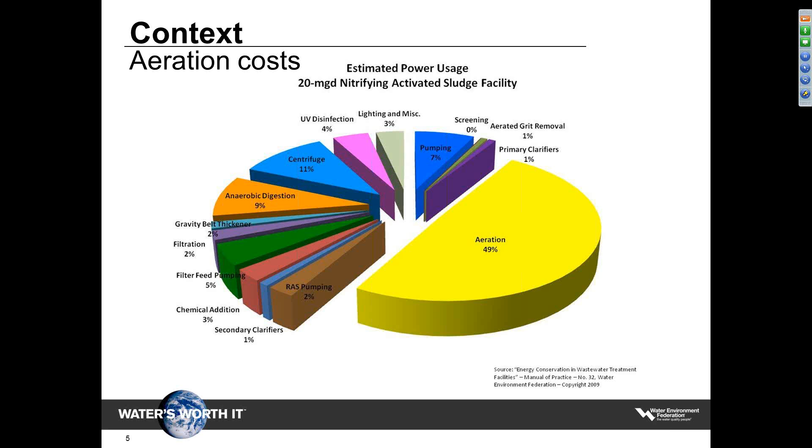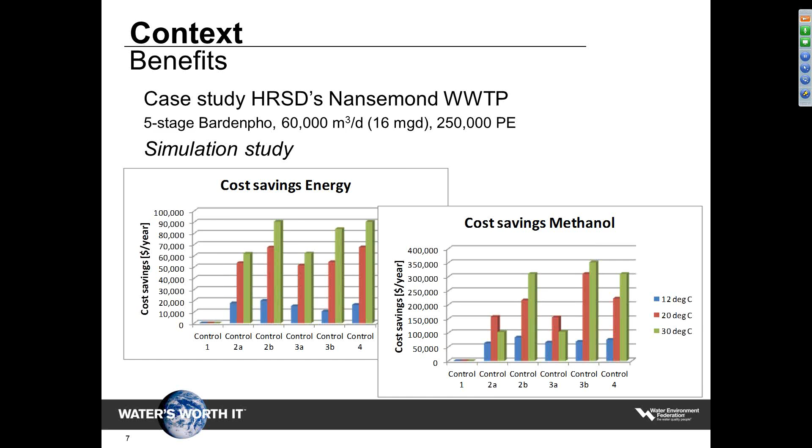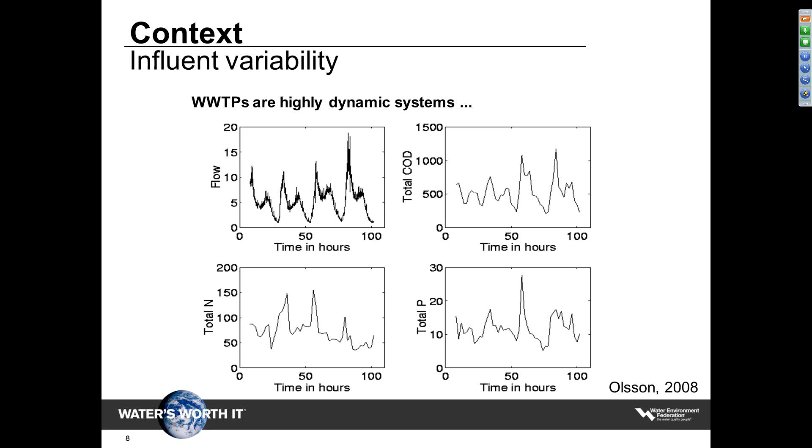So let's have a closer look at it. As you have seen in the previous slide, we have this very high variability of the incoming load and the temperature. However, we typically deal with fixed reactor volumes, so you have fixed volumes for unaerated and aerated zones. And then we design these plants based on peak loads. This is something we have to, because of course we would like to be able to deal with whatever is coming in, right?

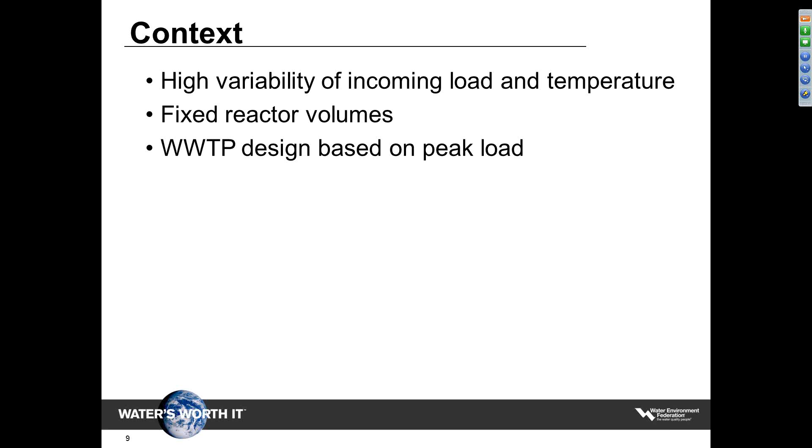All this together means that, well, we have, per definition, unused capacities, right? Because we design for peak loads and we have these variations, and this means that if the plant is not overloaded, every single day there should be potential to do something more efficient.

So what we discuss in the next slides is really biological nutrient removal plants. And as you will know, nitrification is really the rate limiting step, and therefore should also be the target, or the primary target, of the aeration control strategy.

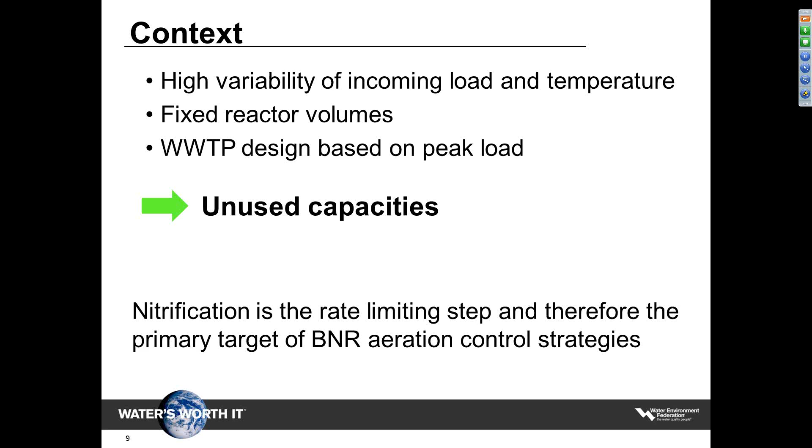Because of this, I would like to go more into nitrification fundamentals. So what is really required to run nitrification under optimal conditions? Of course, we need sufficient provision of dissolved oxygen. We need ammonia as a substrate and some essential nutrients.

This sounds trivial, I guess, but I would like to make clear that if ammonia is gone, there's no nitrification. So it's not required, and therefore we also don't have to aerate if ammonia is gone or is below a certain set point.

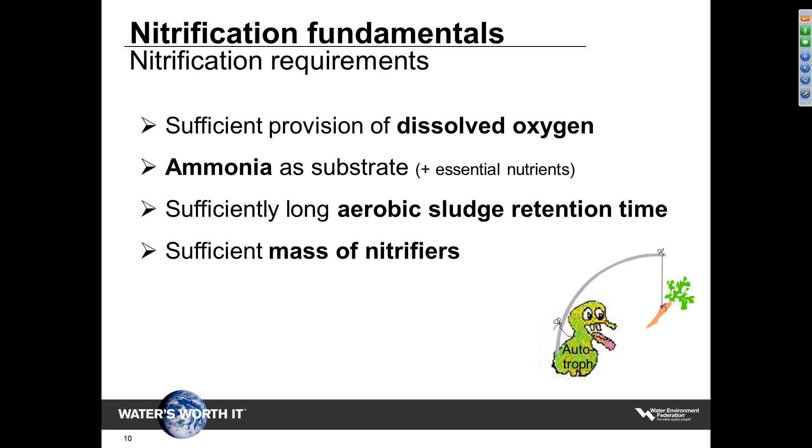What we also need is an aerobic sludge retention time, so that this is sufficiently long. And in the end, what we need is a sufficient mass of nitrifiers. And this is quite important. I will come back to this. So this is a key feature if you would like to design your aeration control system.

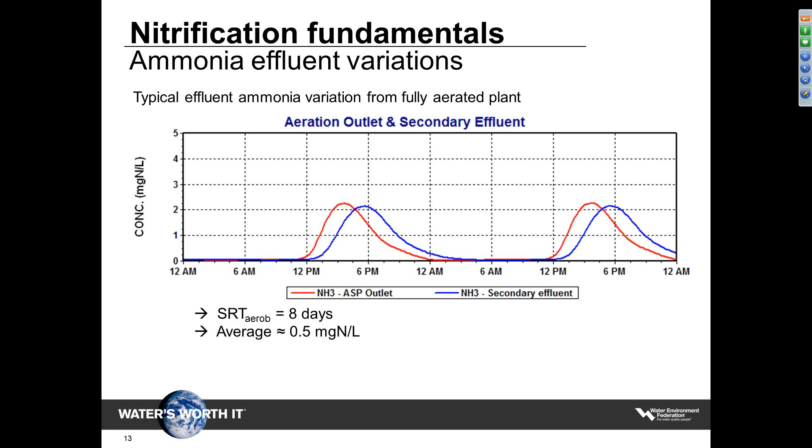And altogether, the effluent concentration of ammonia is about 0.5 milligram per liter. So we will probably call this a fully nitrifying plant, right? So what is the reason for these peaks then? The reason is that the mass of nitrifiers is changing slowly and also depends on the average ammonia load and the sludge retention time. So the sludge retention time was sufficiently high. So in this case, it's only linked to the average ammonia load you removed.

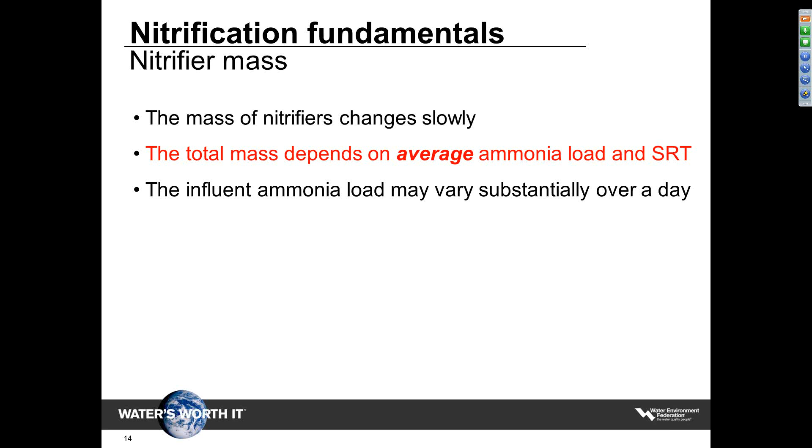So on the other side, we have quite a high variation. Of course, this is an example. There was quite a variation in the influent ammonia load, and this varies substantially over the day. So you have this variation, and you have an average nitrifier mass.

This means that ammonia breakthrough often is due to the limited mass of nitrifiers and not at all linked to insufficient oxygen. This is quite important to understand in order to properly design your aeration control system. Sometimes you cannot fix something with just increasing aeration, right? So it's not linked to oxygen. Often it's really linked to the mass of nitrifiers, and you have to come up with a control strategy dealing with this.

Okay, so let's have a look into different ways of controlling your aeration, and the focus really is on ammonia-based aeration control. In fact, there are two different control goals or objectives here, and it's quite important to distinguish the two to make sure you come up with the right control strategy.

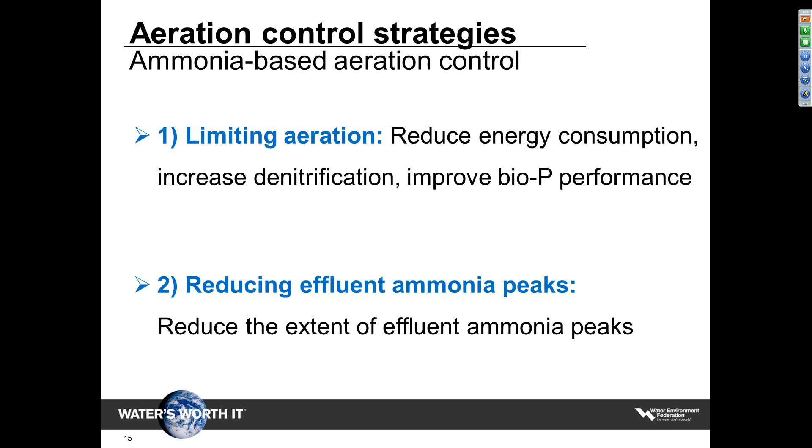The first one is limiting aeration. The goal is to reduce energy, increase denitrification, improve BioP performance—really optimizing the efficiency of your plant. The second goal is to reduce effluent ammonia peaks. So it's not about efficiency, it's really to reduce the extent of the effluent ammonia peaks.

If we look at the first option, limiting aeration, the first thing I'd like to discuss is what's really the difference between DO and ammonia control. The DO control is to provide optimal conditions in terms of dissolved oxygen for all aerobic processes—this is nitrification, but also organic matter removal.

Ammonia control, so if you introduce an ammonia sensor and do ammonia control, this is really to optimize nitrification. The reason is that nitrification is the rate limiting step in typical municipal wastewater treatment plants. So as soon as you fully nitrify, or nitrify down to a low set point, the organic matter is gone as well. So you don't care about organic matter, you focus on nitrification, but this is sufficient for most plants, mainly municipal wastewater treatment plants.

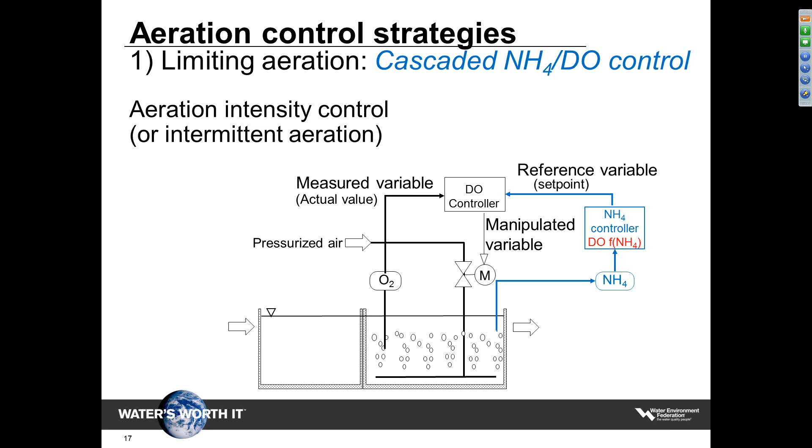Another way of implementing ammonia-based aeration control is that you only measure ammonia. This goes into a controller, and the ammonia controller directly calculates the valve position. I am not that in favor of this solution, and I will discuss why.

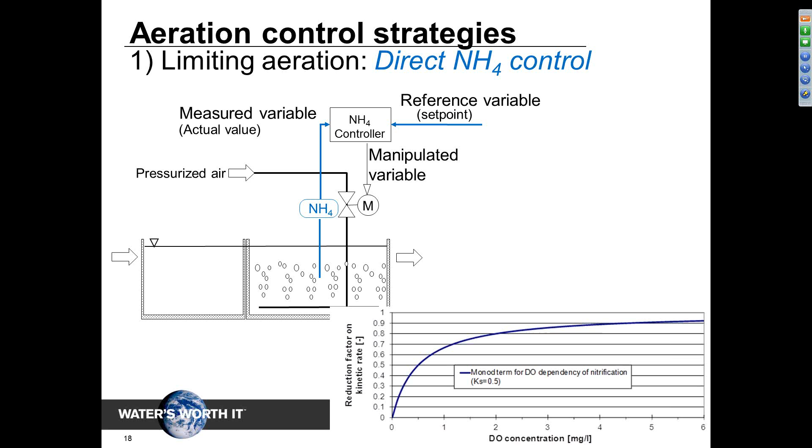So this is bringing back this graph I showed before. What this means is as soon as ammonia is high, this controller will increase aeration. So if you have very high ammonia concentrations, or a peak of ammonia coming in, this automatically leads to over-aeration.

Of course, you could add another DO probe. What you would do then is just change the setup—it's also cascaded aeration control, but then the DO controller sits on top of the ammonia controller. The reason I don't prefer this solution is that it's more difficult to tune, and it also has some other practical limitations. So I clearly favor the first option.

Okay, so now we go to the second control objective. This is reducing ammonia effluent peaks. And there are also two different ways of doing it. The first one is intensity control.

So what we do is measure ammonia, or the ammonia load, somewhere early on, and you get fast information—oh, there's a peak coming in, let's say. Then you increase aeration to the maximum, so you try to provide optimal conditions for nitrification. You try to drive down ammonia in the tanks, and then you create a kind of buffer for the incoming peak, diluting it with low ammonia concentrations in your tank.

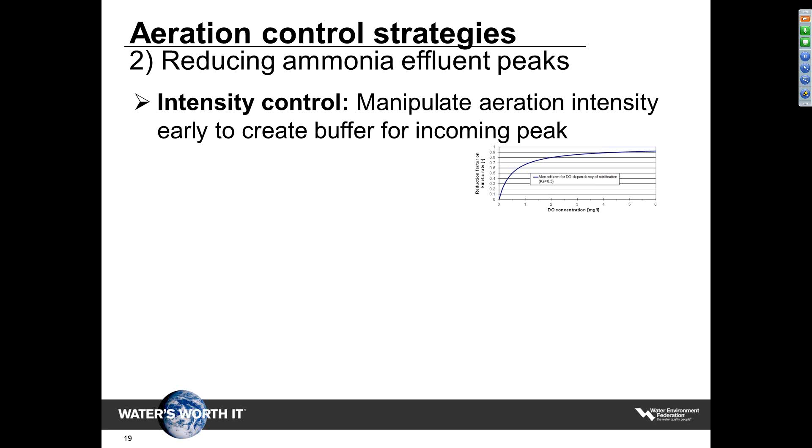The problem, again, is that the impact of this intensity control is quite limited, because more aeration—so higher than 2 milligrams per liter DO—is not providing more nitrification.

Another option to do this type of control is volume control. What you actually do is change the aerated volume by switching swing zones on or off. And what you do with this is really increase the mass of active nitrifiers. So this is quite a powerful solution, and in the case study you will see some more results.

Okay, so now some control fundamentals.

And this is mainly about feedback and feed-forward control and what are the differences. So I start with the most simple one. This is the feedback control.

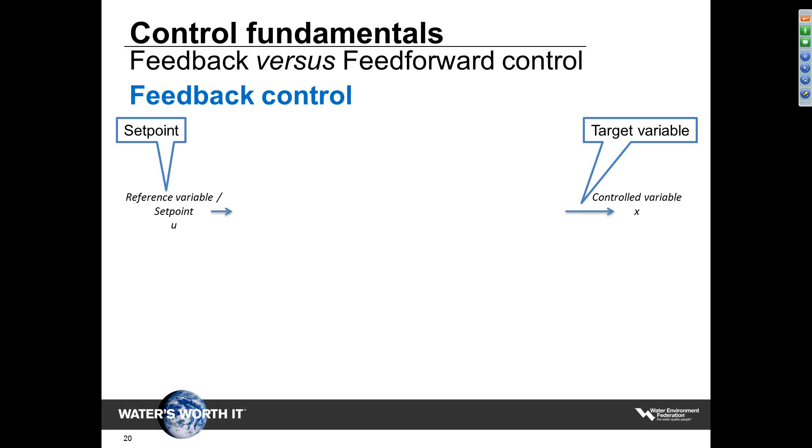And this is really what you should use if you can. So what you have is a target variable, or in control theory you would call it a controlled variable. And then you define a set point. The goal is to maintain the target variable or controlled variable around a specified set point.

Then you have the process and some disturbances. In our case, the process, this is your reactor or your reactors. And then you have disturbances, and this is the change in the influent load, change in temperature, change in operational settings, everything changing the process behavior.

To control this, what you do is you measure the controlled variable, and the measured variable goes back, is compared with the set point. You calculate an error out of it, and this error is used in the controller. The controller will then calculate a control action, and then hopefully this control action has an impact on the process and is able to deal with the disturbances.

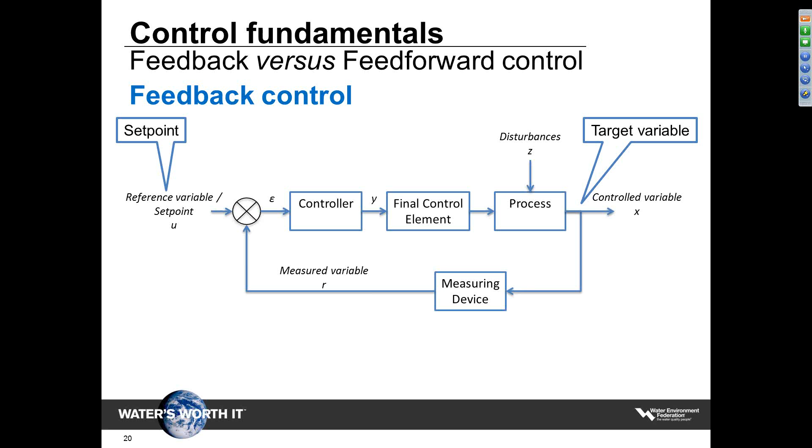So to remember, feedback control is really measuring the process answer. You don't have to know what's going on inside your tanks. You measure the answer, what's coming out, and then you change the settings of your control handle.

The opposite is feed-forward control. And as you can see, the lower part is exactly the same. The difference is that now, instead of measuring the controlled variable, you measure the disturbances. And the other difference is that because you don't know what's really happening in your tanks, you also need a model of your system. And this is quite an important fact.

If you now discuss advantages and disadvantages, the big advantage is that feed-forward control provides really fast reaction. And this is a reaction even before the disturbance hits the plant. So if you need to deal with fast processes, if you have peaks coming in where you have to react fast, then feed-forward control is certainly the way to go.

The downside is that you need a process model. And a model is a simplification of reality. You need sensors as input or signals as input. And this means that there's quite a risk involved, right?

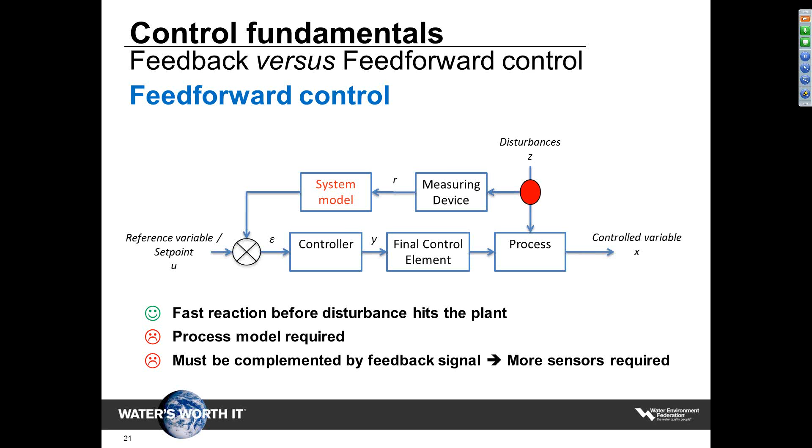Okay, so this is a graph, a scheme where we combined feedback and feed-forward control. You know the black part in the middle, the DO controller. The ammonia controller is also something I showed already. So it sits on top of the DO controller, calculates the new DO set point.

But what is new is the green part. So you measure the flow and the ammonia concentration, so the incoming load. And then the feed-forward controller maybe compares the incoming load with the predicted nitrification capacity. So what the model inside thinks is the nitrification capacity, and maybe decides to also increase aeration.

That the two controllers are not fighting against each other, we have put in a maximum criteria. So this is deciding which controller is going through. And we use the maximum criteria. This is pretty simple. The controller with higher air demands is going through. And this concept is also used in the case study, or was also tested in the case study.

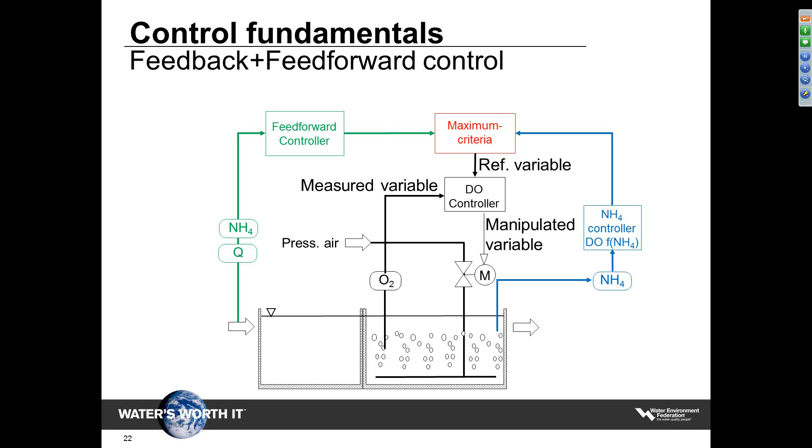And all these control loops are connected. This is mainly to make you aware that it's not a simple task to tune all these, because all have different time constants and have to be carefully tuned. So if you design your aeration control system, make sure that in the end you have an experienced control engineer doing the fine-tuning on site.

So this is not something you can do in a model. There has to be somewhere going out and tuning. And often you need some retuning after a while, or just make sure that your controllers are properly tuned.

Okay, so this was about fundamentals. Now let's have a look at this case study I mentioned earlier.

This case study was about the Nansemond plant, one of the Hampton Roads Sanitation District plants. It's a 5-stage plant, 60,000 cubic meters per day, 16 MGD, or about 250,000 connected population equivalents.

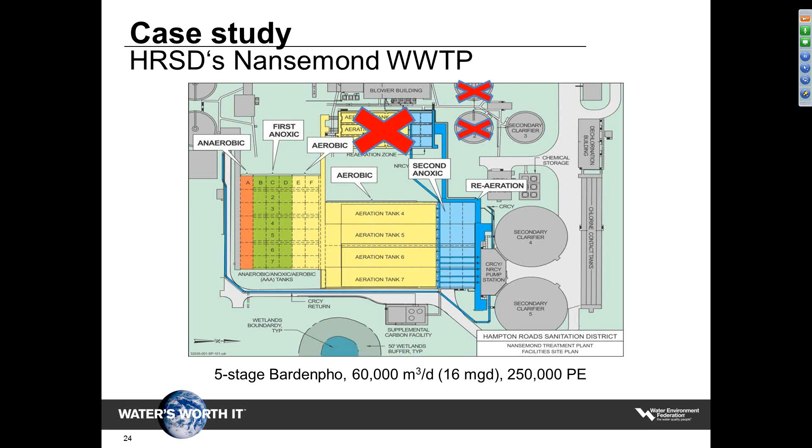We did a careful data evaluation and came up with 1 week of a typical pattern, including weekly variations and diurnal variations. We came up with 3 different influent and temperature scenarios, and then 1 scenario where we created an artificial ammonia peak, mainly to test the feed-forward concept and whether we really need to implement it.

We tested a whole bunch of different ammonia-based control scenarios. First, we focused on modeling the existing control strategy, just DO control. Then we had a couple of ammonia feedback controls, and then feed-forward feedback ammonia control. If you're interested, just drop me an email, and I can send you 2 papers from last WEFTEC where all the details about the control strategies are included.

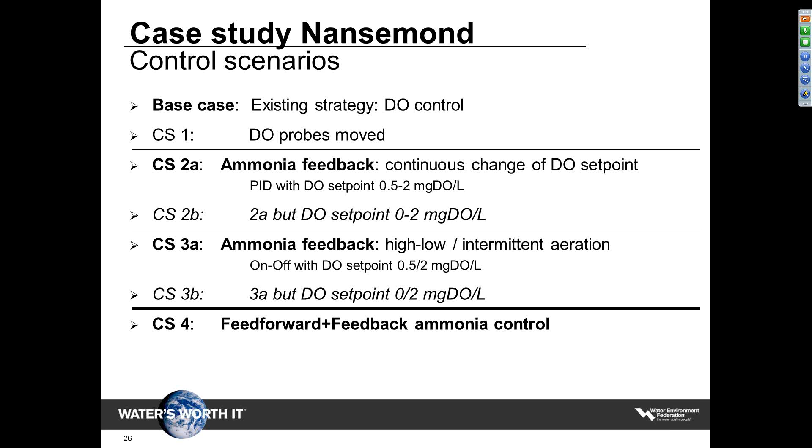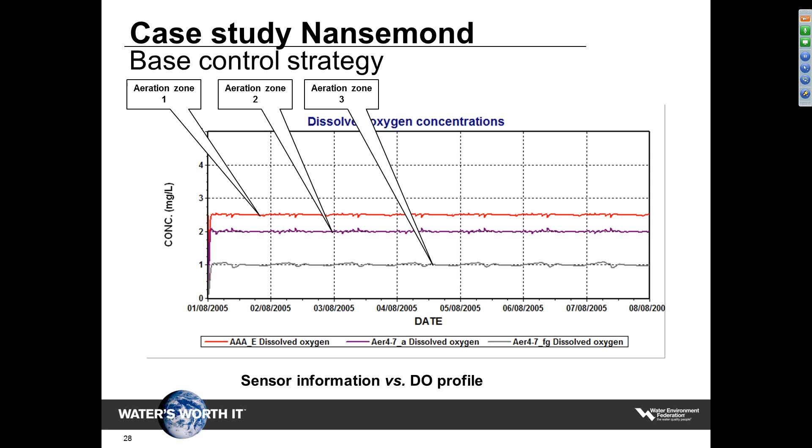However, even more important is that downstream of the second aeration zone, downstream of the DO sensor, we realized that we have quite low DO concentrations. This is not something you typically see because you don't have a DO probe in there, but it shows that the location of the DO sensor is quite important. In this case, 0.5 means that nitrification is quite limited here.

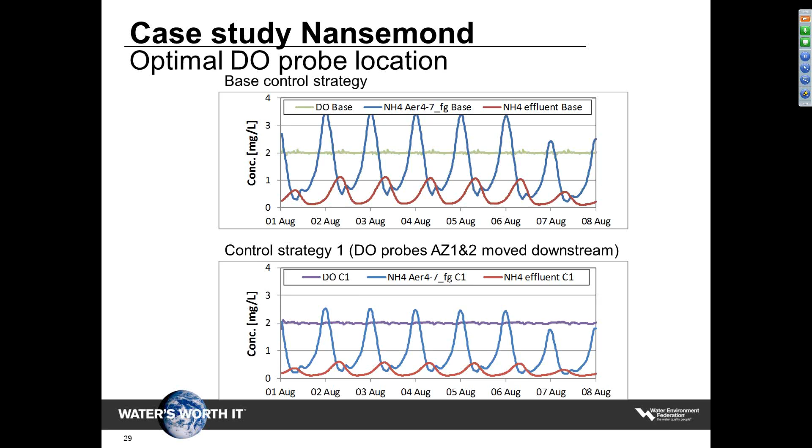Okay, so the next slides mainly focus on testing the feed-forward part. Again, if you're interested in the whole study, just send me an email, I can send you the WEFTEC paper. So what we did is we modeled all the tanks, methanol dosage, all the recycles, and so on. And then, of course, we also modeled the 3 different aeration zones.

So we measured the flow and the ammonia concentration in the first anoxic zone. The reason we placed the probe there is just because of maintenance - it's much easier to maintain a sensor in the anoxic zone than running it in the raw wastewater.

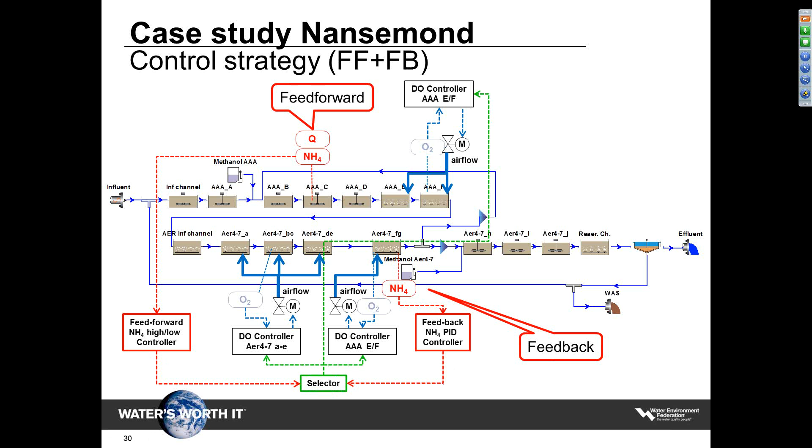So again, you have this ammonia feedback loop, the ammonia feed-forward control, and then you have to have a selector, and the selector defines the DO set point for all three DO control loops.

If we look at the ammonia concentration results at the end of the aerated zone, there's not a big difference between pure feedback ammonia control and the combination of feed-forward and feedback. In black, this is pure feedback, and in red, this is the combination of feed-forward and feedback. There's no significant impact on the effluent ammonia concentration. So it works - we saw from the DO profile time series that it was active - but in fact the control authority, or the impact on nitrification, is minor.

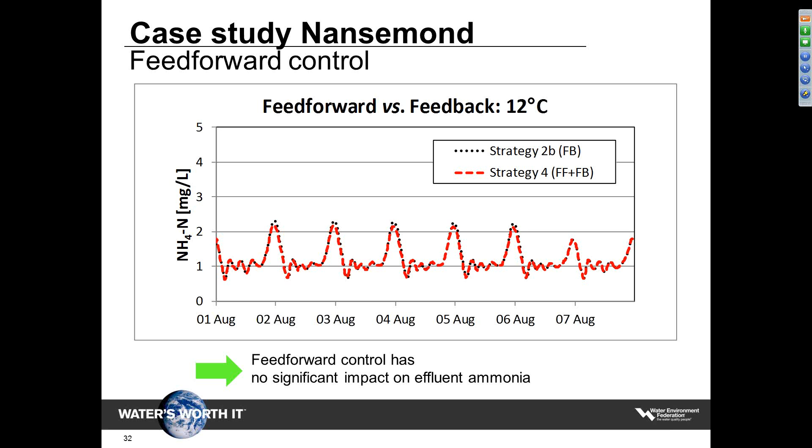The same is true when we use the last influent scenario with this big ammonia peak in the influent. In blue, this is just feedback, and the dotted blue line is when you also have feed-forward. You see that even at extreme peaks, there's quite a limited impact of this feed-forward concept.

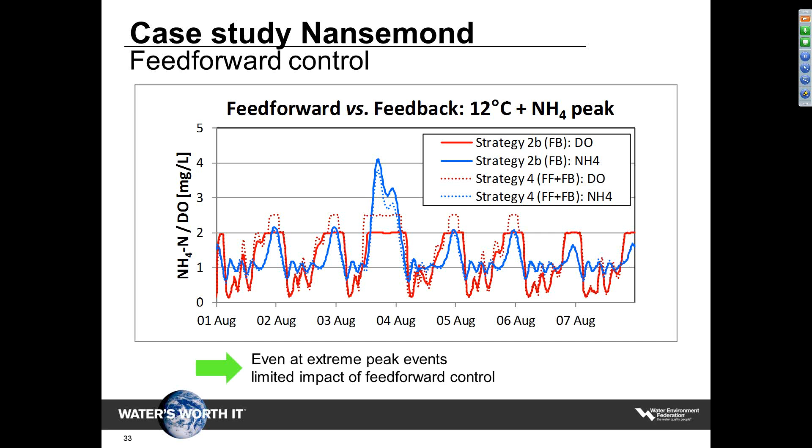So to summarize, feed-forward control - and this is only for limiting aeration, right? You have to be aware that we only change the intensity of the aeration. In general, feedback control is more robust, and feed-forward requires safety factors against model failures. A simple model may not be accurate enough. However, if you go for a more complex model, then you need several inputs, which means you need to buy sensors, maintain sensors, and this, of course, eats into your savings.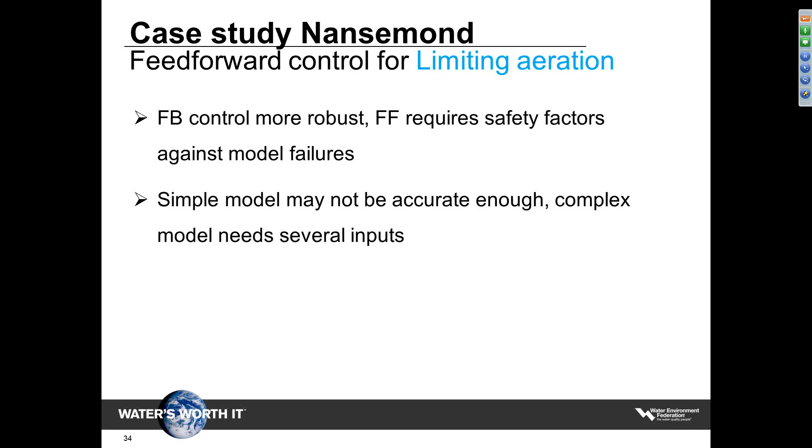The effluent ammonia concentration changes quite slowly, so I would say in most cases feedback control is sufficient. As we could see, the control authority - the impact of this control - is very limited at higher ammonia concentrations. So to summarize: increased risk, more complex, more expensive, it eats into your savings, it's often not required, and sometimes not even functional.

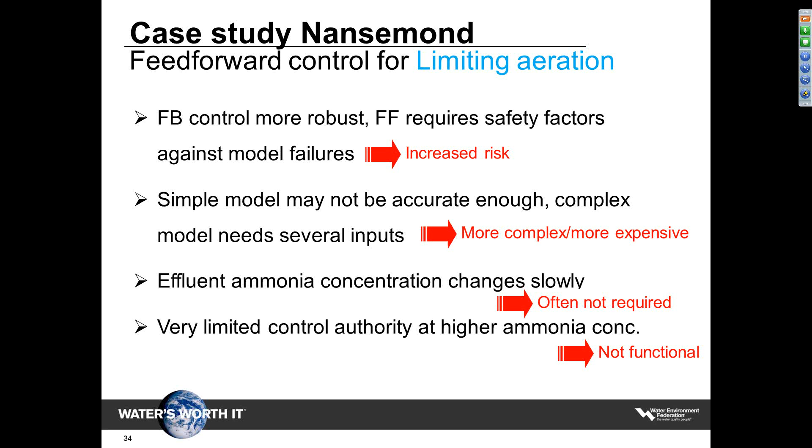Okay, so this was about limiting aeration. Maybe you remember we had two options. The second option is volume control - switching on or off swing zones. By switching on a swing zone, you actually increase the mass of nitrifiers. What is actually the limiting factor here?

Okay, so there are other issues coming out of these simulations. Now I would like to focus on three different things. The first one is the minimum and maximum blower capacity. In this case, we didn't put the bounds directly in the model because we wanted to see if there is a benefit if we buy a new blower with a lower capacity that we can run at lower airflows.

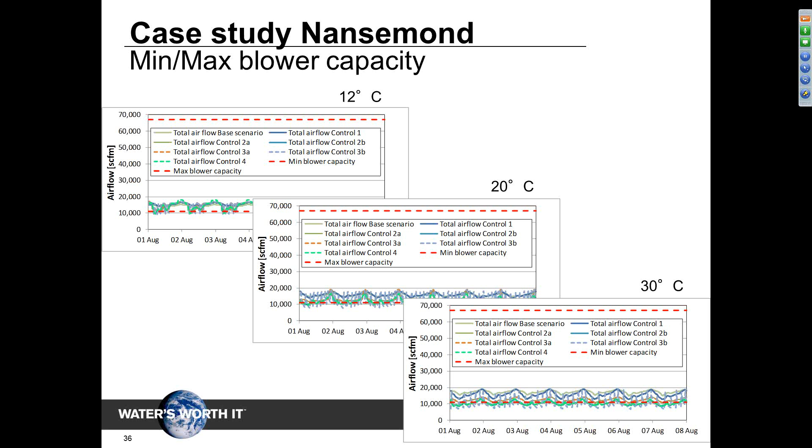Another issue is mixing requirements. So what we did here is we plotted the airflow, and this is just a literature value for the minimum mixing requirements per tank. But the settleability of the sludge really changes from plant to plant. So I'd suggest you test settleability and test how much air you really need to keep the sludge in suspension. This number, with some safety factors, is what you put into your control strategy to make sure you always have sufficient mixing.

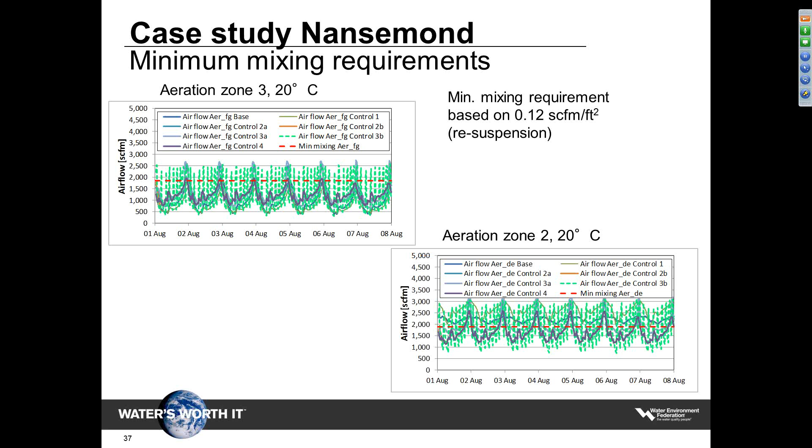Or maybe out of the simulation study, you realize it's actually cheaper to go for mechanical mixing. I saw this at a lot of plants, that we couldn't turn down the air because of mixing requirements, and this is something you nicely get out of these simulations.

The last point is airflow per diffuser. My understanding is if you always run lower than the minimum airflow per diffuser, or below the specification of your diffusers, you might end up with increased fouling. I recently discussed this with a diffuser manufacturer, and they said they improved the material so it's not a problem. But still, be careful in the design—running below minimum specifications might cause increased fouling, which reduces the efficiency of your aeration system and reduces your savings. This also comes out of, or gives nice indications from, your simulation study.

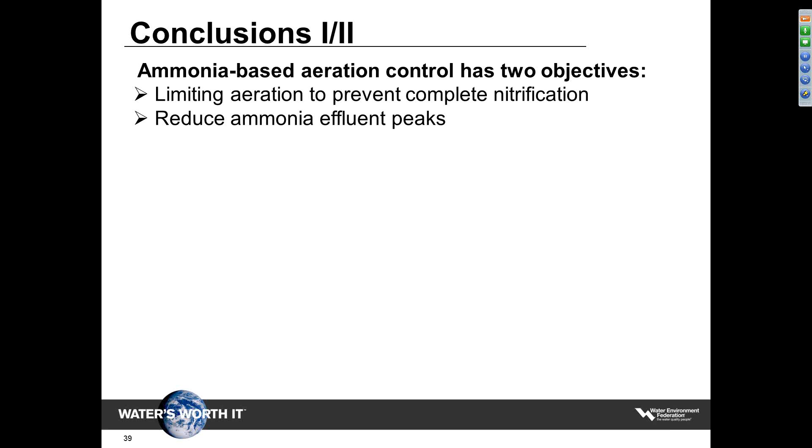So I come to my conclusions. I'd like to remind you that ammonia-based aeration control really has two objectives. One is limiting aeration to prevent complete nitrification—this is really to optimize the efficiency of your plant. The second is to reduce ammonia effluent peaks. Be careful, you have to define these objectives up front, and depending on what is more important, you will come up with different control strategies.

Limiting aeration is about saving energy. It improves denitrification, we saw more robust BioP, and at Nansemond we saw less carbon addition. What's important to remember is there's quite high control authority for the impact of the control to limit nitrification—if you reduce the DO level, there's quite a nice control handle you have.

However, on the other side, just increasing DO levels doesn't improve nitrification. One thing to be aware of is the DO probe only gives one point in your reactor, so it might be that you have to increase the DO setpoint to make sure you have sufficient DO everywhere.

The second objective is to reduce ammonia effluent peaks. You have to remember that ammonia effluent peaks are often due to limited mass of nitrifiers, and this is really a kinetic constraint that cannot be solved by more air. So you have very low control authority with aeration intensity control, and if you have to deal with ammonia peaks, swing zones is really the way to go.

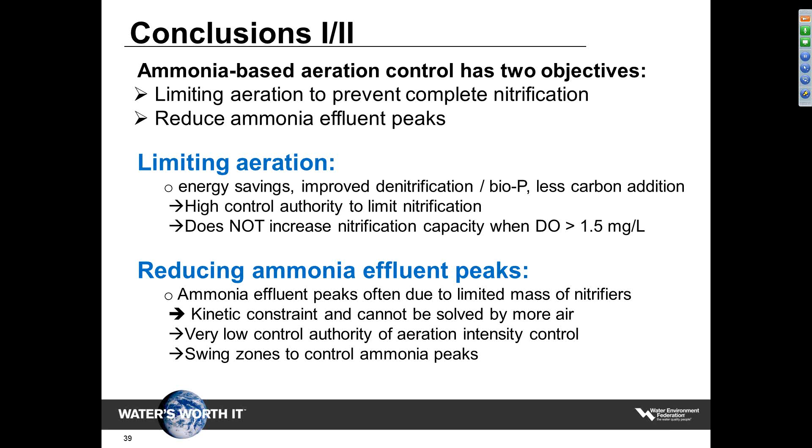So if you design ammonia-based aeration control, you have to ask yourself: what is really the control objective? And is feed-forward really necessary? In my experience, most of the ammonia peaks you see are homemade—often related to dosing the digester supernatant into the reject water in one shot, creating a big ammonia-rich peak, or related to not having sufficient DO levels throughout the tanks, and so on. You should solve these operational problems before you go for feed-forward control.

Feed-forward aeration control often involves higher risks. It's more complex, more expensive, it eats into your savings, and at least for intensity control, it has quite limited control authority. If you have to deal with effluent ammonia peaks—maybe you have industrial discharges and really see these peaks coming in and have to deal with it—then the way to go is swing zones or volume control.

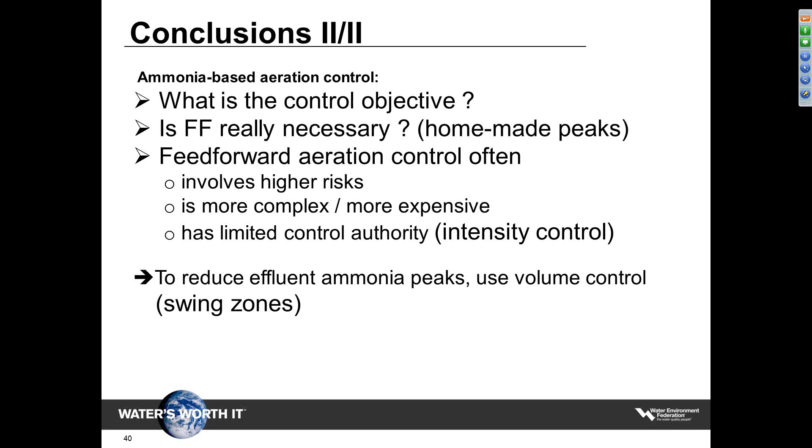The last statement I'd like to make is that we have these nice tools available, and these dynamic simulators are really the perfect tool to also design your process control system and test it for various scenarios.

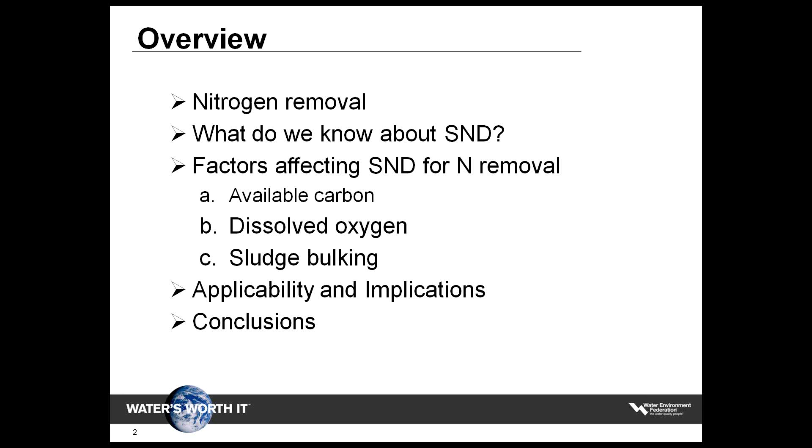First of all, we know that the biological reduction of nitrogen in the activated sludge process relies primarily on two mechanisms: aerobic nitrification and anoxic denitrification. Generally in conventional systems, these two processes are carried out in physically separated anoxic and aerobic zones, sometimes with internal mixed liquor recycles.

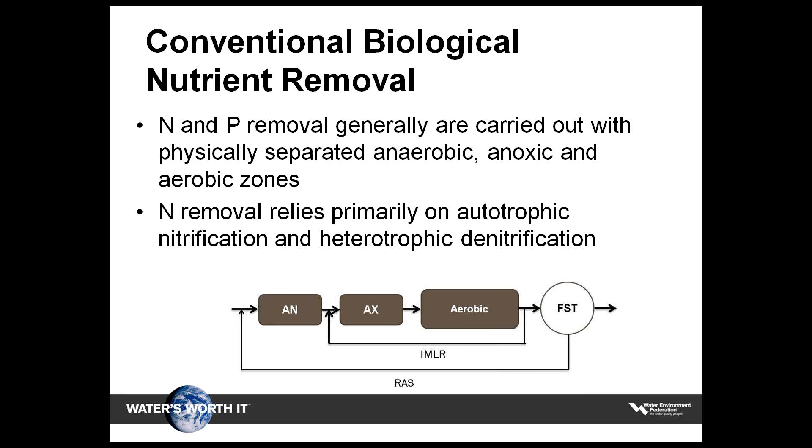However, when we talk about SND, or simultaneous nitrification-denitrification, we're talking about the biological process where nitrification and denitrification occur at the same time in the same reactor, or within the same floc.

We already had some questions about sludge bulking, and we'll talk more about that later. But we have to realize that by promoting SND in some reactors, we do encourage conditions for low DO bulking, which is one of the disadvantages of this process.

SND relies on achieving a dynamic balance between nitrification and denitrification. Since we're doing everything within the same reactor or floc, we need to find what works for one process without affecting the other. There are a couple of variables or processes that affect SND, listed on this slide.

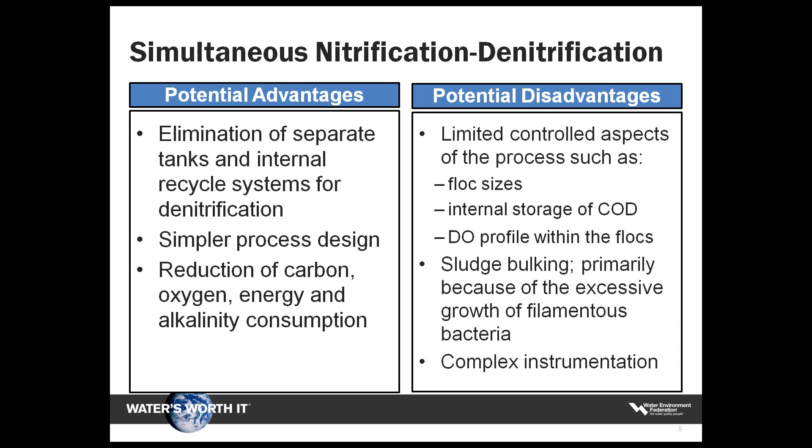Here we have the traditional approach to biological nutrient removal, and this is a bit of the basics about nitrogen removal. We know that we have the conversion of ammonia to nitrite and subsequently to nitrate by the autotrophic nitrifiers, followed by the reduction of nitrate to nitrogen gas by heterotrophic denitrification. This is just the conventional nitrification-denitrification pathway.

Nitrification is an aerobic process. We need DO, as Leif mentioned in his presentation. Ammonia and nitrite function as electron donors during the nitrification process, so we have to have ammonia and nitrite to complete nitrification.

In the case of denitrification, the nitrate that was created during the nitrification process acts as an electron acceptor in the absence of oxygen, and it converts it to nitrogen gas.

It is well known that if we couple nitrification and denitrification in a single reactor, we can reduce the net process oxygen requirement, because now we're using the nitrate produced during nitrification as the terminal electron acceptor for removal of the biodegradable substrate. So denitrification will allow us to reduce the overall oxygen requirement in this process.

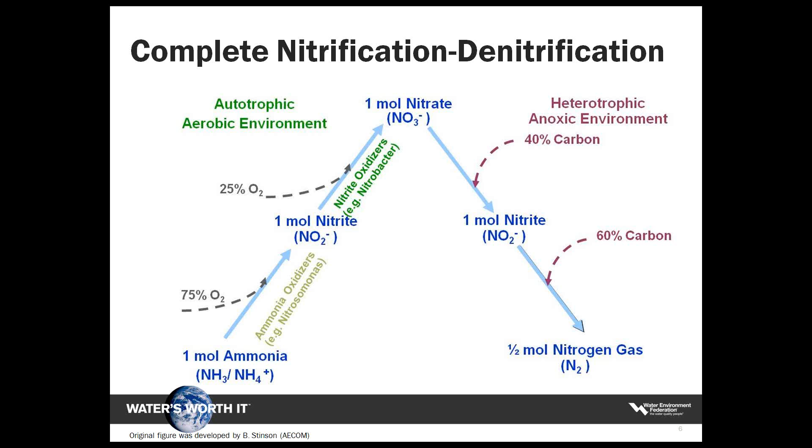However, if we look a little deeper, nitrification of influent ammonia results in consumption of about 4.57 milligrams of oxygen per milligram of ammonia nitrified. However, the nitrate produced during nitrification can be used as an electron acceptor for removal of biodegradable organic carbon, resulting in an overall oxygen gain of approximately 2.86 milligrams of oxygen per milligram of nitrate denitrified.

This leaves us with an approximate net oxygen consumption of 1.71 milligrams of oxygen per milligram of nitrogen removed, which is the net oxygen demand during nitrification-denitrification, similar to what we can get in an SND reactor.

However, now I'm going to step a little further and talk about what we've been calling recently nitritation-denitritation. When we talk about nitritation-denitritation, we're actually referring to the nitrogen removal process in which the second step of nitrification, the oxidation of nitrite to nitrate, is inhibited. Then complete denitritation from nitrite to nitrogen gas can be achieved with some carbon.

Nitrogen removal via nitritation-denitritation may yield up to about 25% reduction in aeration and 40% reduction in COD requirements, in addition to reducing biomass production. These reductions would be particularly advantageous in wastewater treatment plants treating wastewater deficient in COD. Therefore, there are some advantages to doing this type of process.

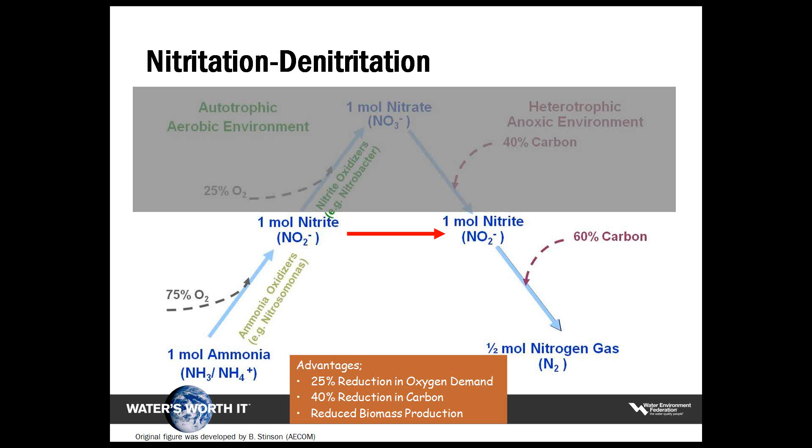This alternative nitrogen removal process has led people to believe that some oxygen savings, as mentioned previously around 25% oxygen reduction, could be realized, and therefore we could translate that to mainstream processes. However, if we step a little further...

Looking at these oxygen demands or requirements, we have that the net oxygen consumption resulting from nitrification is 1.71 milligrams of oxygen per milligram of nitrogen removed, actually the same factor that we obtain when we looked at the conventional nitrification and denitrification pathways.

Therefore, there's always the question about whether we should implement nitritation-denitritation or just do conventional simultaneous nitrification-denitrification, whichever is the right way to go. And of course, the answer is not straightforward. However, the selection at the end of the day is going to depend, based on my opinion, on the carbon to nitrogen ratio that you have in the wastewater.

Now I'm going to talk a little bit about some of the factors affecting SND, which could be SND via nitrate, or just nitrification-denitrification. We can call it SND via nitrite.

These two figures show the effect of the influent COD to nitrogen ratio, or BOD to nitrogen ratio, on denitrification from a full-scale facility as well as a pilot plant. Data from the full scale is on the left plot, based on influent BOD to TKN ratio. This data shows that complete denitrification can be achieved consistently when the influent BOD to TKN ratio is at least 6. However, when this ratio falls below 2, limited denitrification was achieved at the facility, since we have limitations of carbon.

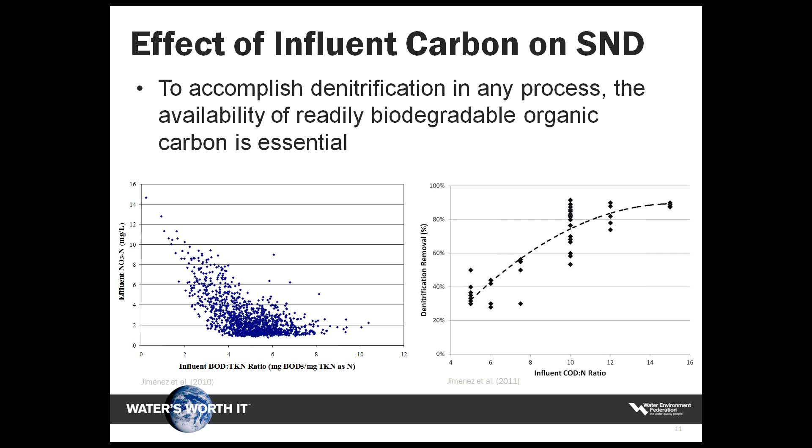Similar observations were obtained at the pilot plant, shown on the right, where denitrification performance increased as the influent COD to nitrogen ratio increased. Very limited denitrification was observed at the pilot plant at low COD to N ratios, as low as 6 or lower. There's not a direct comparison, since one plot is based on COD and the other on BOD. However, we can see in both plots that we can achieve complete denitrification at high BOD or high COD to nitrogen ratios, showing the effect of that fraction on overall nitrogen performance, or your denitrification.

Another factor I want to touch on is the control of DO and its effect on SND. As Leif mentioned, DO is critical for nitrification, and in most cases it limits the nitrification reaction, especially at low concentrations. So we know that control of the bulk DO concentration in SND reactors is essential for achieving a high degree of SND. The success of the SND process relies on the balance of the bulk DO concentration between the kinetic reactions of nitrification and denitrification, which need to happen concurrently in the same reactor, or in the same floc.

Based on data from a full-scale facility, we can see that the optimum bulk DO concentration ranges, in this facility specifically, from about 0.3 milligrams per liter to about 0.7 milligrams per liter. When the bulk DO concentration drops below 0.3 milligrams per liter, SND performance is limited by nitrification. We lose nitrification, and therefore get spikes of ammonia concentration in the effluent. However, if the DO concentration exceeds 0.7 milligrams per liter, we run into issues with denitrification instead.

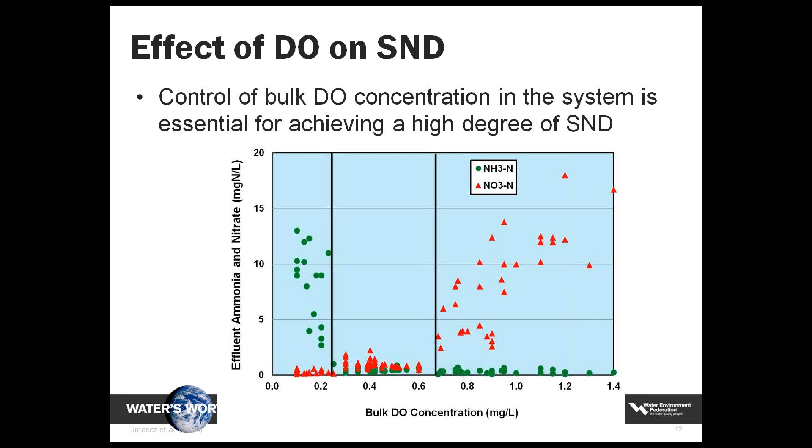It should be noted that these bulk DO levels are dependent on the floc size in the system. Therefore, it's difficult to draw general conclusions about what's the best DO concentration for SND. We know that a larger floc might require higher bulk DO concentrations than a smaller floc. So overall, there's not much we can conclude from this plot, except that there's a sweet spot within your reactor where nitrification and denitrification can happen concurrently at the same DO concentration, and you need to optimize for that.

We already saw this plot, presented by Leif as well. This figure shows the theoretical effect of the bulk DO concentration on nitrification kinetics. For this plot, we're using a half saturation DO constant of 0.01 milligrams per liter, as shown on the figure. As Leif mentioned, we normally operate these nitrification facilities at DOs between 2 and 3 milligrams per liter, because, as we can see here, this maximizes the kinetics of nitrification.

However, one can see from this same figure that if we start dropping the DO to lower concentrations, especially from 0.5 milligrams per liter or less, similar to the results I presented previously, a significant drop in nitrification efficiency will occur and will eventually affect the performance of the plant.

One nice thing about SND is shown in these two plots. In the top right-hand plot, we have 3 bars. The first bar measures specific nitrification rates from a reactor operating at 3 milligrams per liter DO concentration. The DO was subsequently dropped to about 0.5 milligrams per liter, the reactor was spiked with ammonia, and we measured nitrification rate. We observed a significant reduction in nitrification performance, dropping from about 6 milligrams of ammonia per gram VSS per hour to about 3, roughly a 50% reduction.

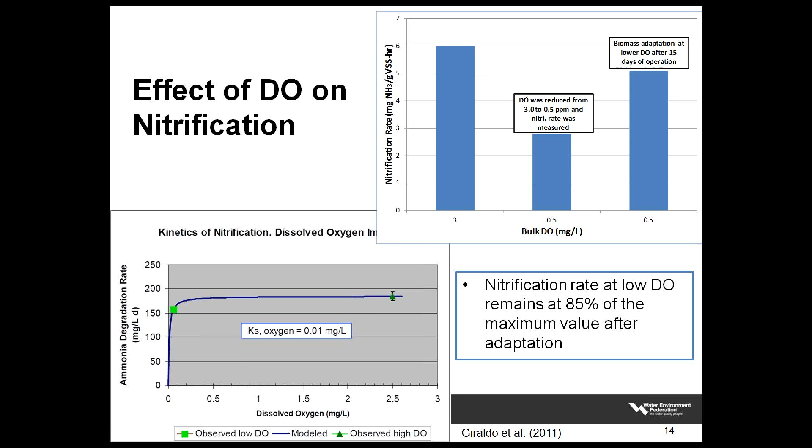After looking at these aspects of SND and the new work currently being done at, for example, Blue Plains, DC Water, and Hampton Roads Sanitation District, we now have new tools being developed by these two research groups that will allow us not only to promote SND in reactors, but also to optimize and control these systems.

One aspect we're looking at is implementing ammonia-based aeration control, as presented in the previous presentation, which allows stringent control over DO to do nitrification, providing enough air to just nitrify what we have to. We can then control the aerobic SRT to as long or short as needed by controlling the aeration profile. Based on observations at Hampton Roads and DC Water, this cyclical aeration, or transient anoxia as we call it, provides benefits in terms of NOB repression.

As I mentioned at the beginning, we have 2 ways of analyzing SND: one is via nitrate, which is complete nitrification then denitrification, and the other is nitritation-denitritation. In cases where we want to implement nitritation-denitritation, the key is NOB repression, so we need to dig deeper into this if we want to maximize performance.

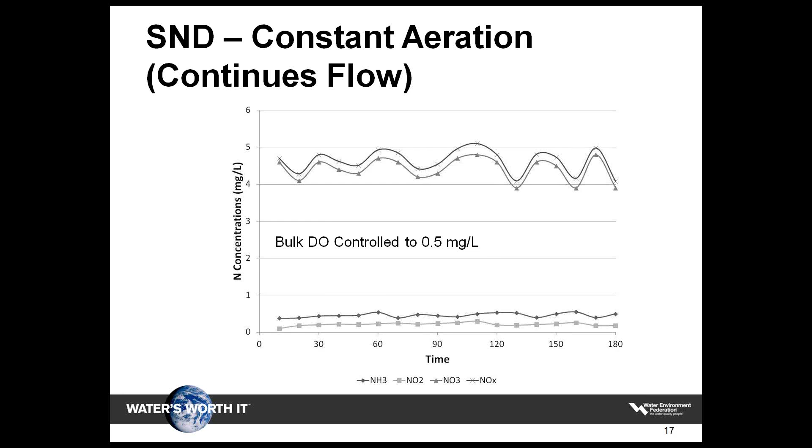We also collected samples from the same continuous flow experiments and ran batch tests to follow the ammonia profile over time. What's interesting is that we're not seeing much nitrite being built during the batch test; just a little nitrite built as the reactor started, but otherwise it was consumed. Therefore, based on these results at a constant DO concentration, we could not inhibit the NOBs, so we didn't achieve nitritation-denitritation, but rather straight simultaneous nitrification-denitrification.

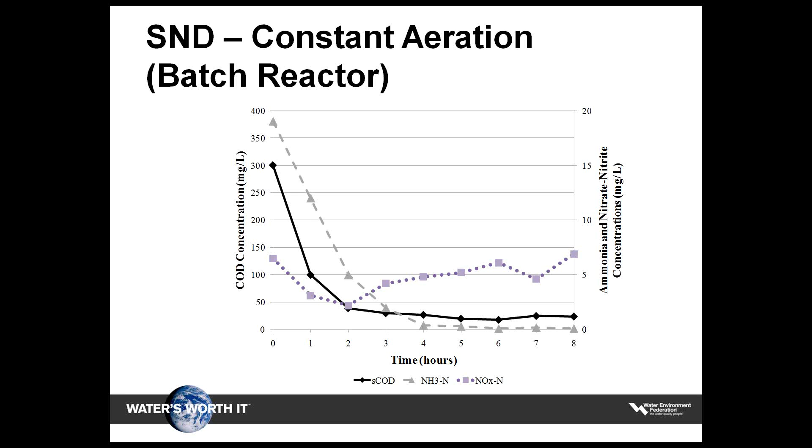A similar batch test was performed using the seed from this reactor, and now you can see a nice buildup of nitrite during this process, which is an indication that the NOBs are being inhibited, or at least suppressed. The only difference between the two reactors was the cyclical air in the second reactor. Therefore, we think that by controlling that cyclical air and providing some transient anoxia conditions, the NOBs can be inhibited, and then nitritation-denitritation could be implemented in mainstream plants.

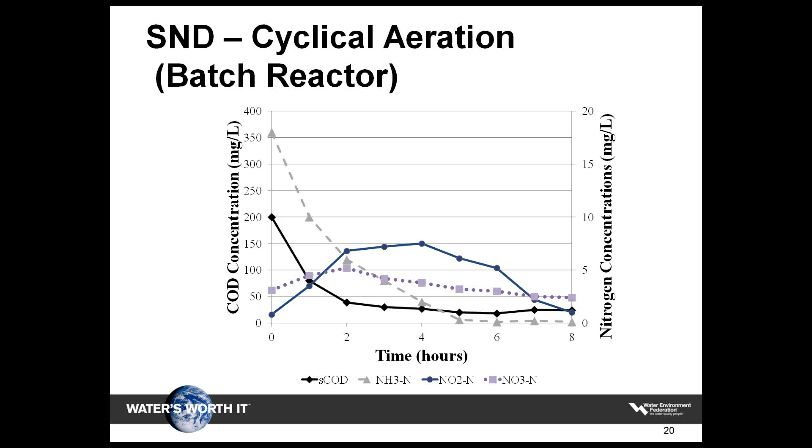Based on the results from these experiments, we can conclude the following. We know that the rates of the ammonia oxidizing bacteria (AOBs) are not significantly affected during the SND, likely because of some adaptation of the biomass to the low DO conditions. The nitrite oxidizing bacteria (NOBs) seem not to be inhibited by the low DO conditions during the SND, which means it's really difficult to operate just a constant low DO reactor and inhibit the NOBs.

Therefore, by controlling a constant low DO reactor, most likely we're going to select for simultaneous nitrification and denitrification. The NOB rates are slowed down during cyclical air due to the transient anoxia—at least that's the hypothesis we have. This creates a possible nitrite shunt during the process, where we utilize the nitrite from nitritation as an electron acceptor for denitritation, reducing the carbon requirements for this type of process.

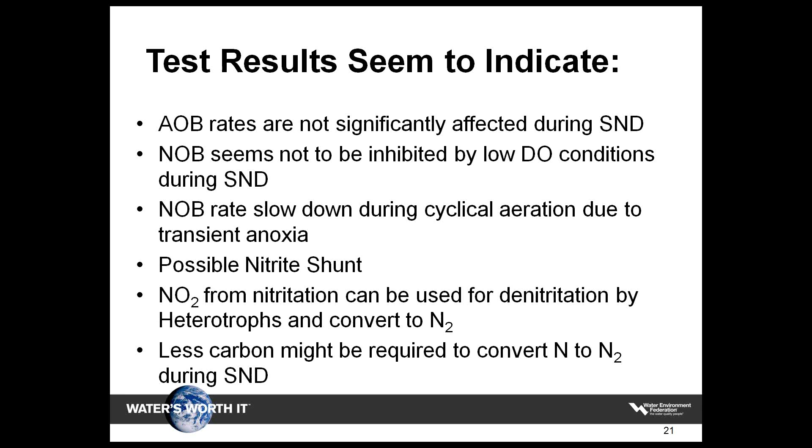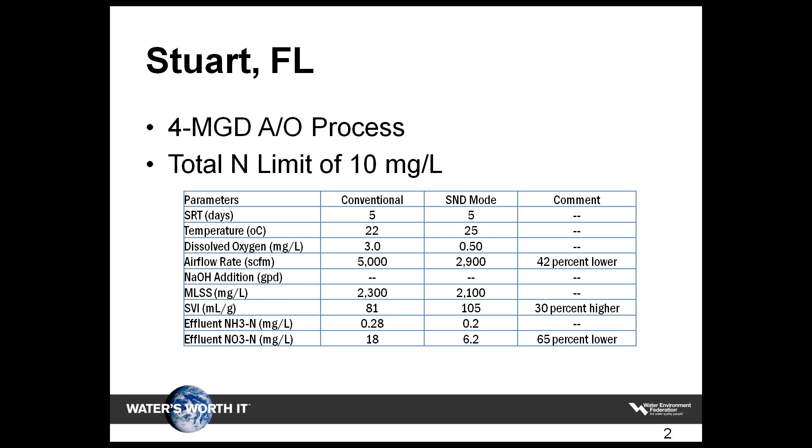So I've been talking about nitrate and nitrites and SND. Here I just have three case examples where, at least in my opinion, we can select for either SND or nitration or nitritation, denitritation.

In this first case, we just have a conventional facility, and this guy selected an MLE plant without primary clarifiers. Most likely by looking at the C to N ratio, the COD to nitrogen ratio required for SND, which is about 8. Most plants do have enough carbon to nitrogen ratio to achieve a high degree of SND. Therefore, in this case, it's most likely we're going to select SND via nitrate, just because we don't have a benefit or an energy benefit to go into nitritation, denitritation.

One of the recommendations I have is providing ammonia-based aeration control. The reason to do so is to make sure that we can actually select the aerobic SRT required for nitrification. And then it allows you to provide that DO within the range that you want to work with.

And of course, in this case, we have lower energy generation potential since we're talking about energy. The only reason why I say that is because in this case, we're just sending waste activated sludge to anaerobic digestion, therefore the energy potential is low.

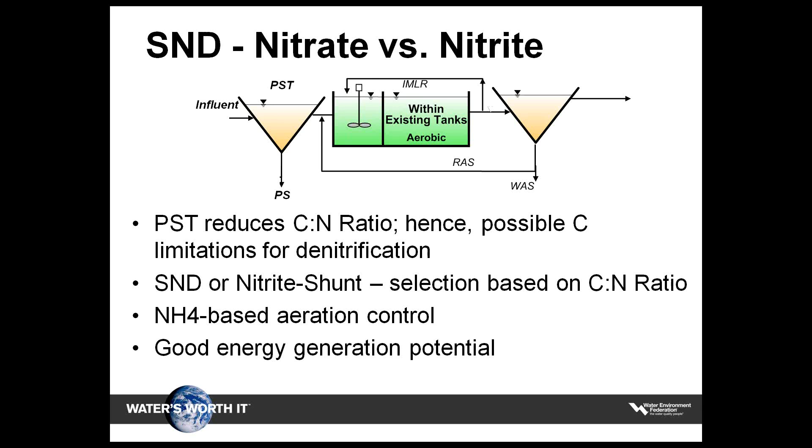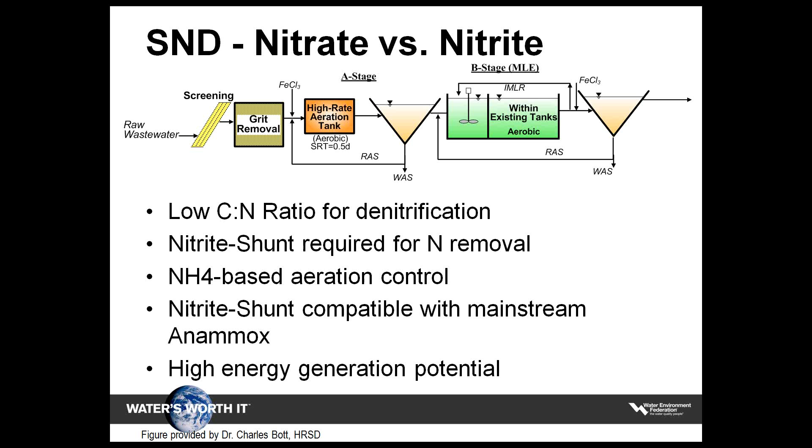So we're looking at this configuration of nitrite shunt with a two-stage process. It's compatible with mainstream anammox, and that's kind of the research that's been going on these days, how to complement the mainstream anammox with nitrite shunt in a B-stage reactor.

One of the ways we can control it is by using aeration-based control. Since the literature, at least what we've looked at, doesn't show an indication that by doing aeration-based control we actually encounter low DO bulking problems. Instrumentation and control requirements are going to be a little bit higher than conventional plants, but not much. And then the operators, of course, we know that we have a limited impact on some of the parameters that actually drive SND. However, we're making strides into controlling these processes now.

Based on the results presented here, we know that COD to nitrogen ratios of about 8 are fairly adequate for SND, and about 3 based on my experience for nitrite shunt, based on the literature review and some of the batch experiments I've performed. The optimum bulk DO concentration ranges between 0.2 and 0.7, so you can get both nitrification and denitrification occurring at the same time. SND is more susceptible to nitrification limitations, driven by the operating DO condition, and to denitrification limitation, driven by carbon. We can actually manipulate those two by controlling, especially the DO, through ammonia-based control.

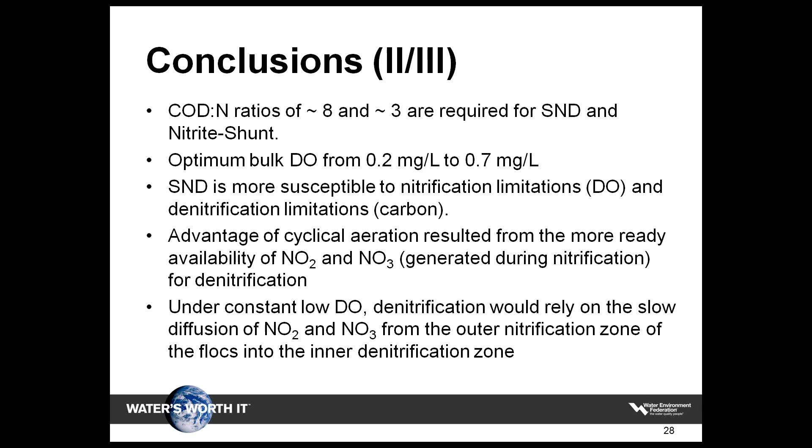Nitrite shunt is possible in mainstream facilities. However, it's going to be driven by the carbon to nitrogen ratio. And of course, we have to finalize, or at least move forward, our understanding of how we can accomplish this. I'm mentioning here transient anoxic conditions as one way of doing it, but we're still trying to understand how that can actually be implemented in full-scale facilities.

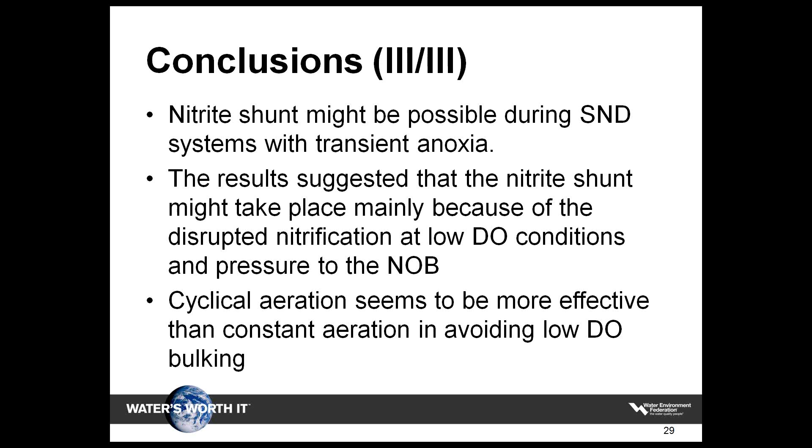And with that, I think that's all we have for my first presentation.

Thanks, Jose. Quite a few people have asked questions related to the COD to N ratio, and also asking about HRT and SRT. They're not totally the same thing, but they're kind of related. If you have a higher loaded system and are more aggressive on the design, you end up having a shorter SRT. How does that factor into the ability to do SND?

When you look at an SND facility, you have a couple of things going. First, you have to select the proper SRT to actually nitrify, and that's driven, and a little bit more susceptible in SND facilities because of the lower DO. By having a high rate system, and in the case of HRT, the idea would be to provide just enough HRT so you can denitrify. You can use available carbon for denitrification, because it's driven by that reaction as well, by the HRT. So you have those two components you have to address, similar to what we do right now when you design a post-anoxic zone. You look at the HRT and the biomass available, and design your system that way.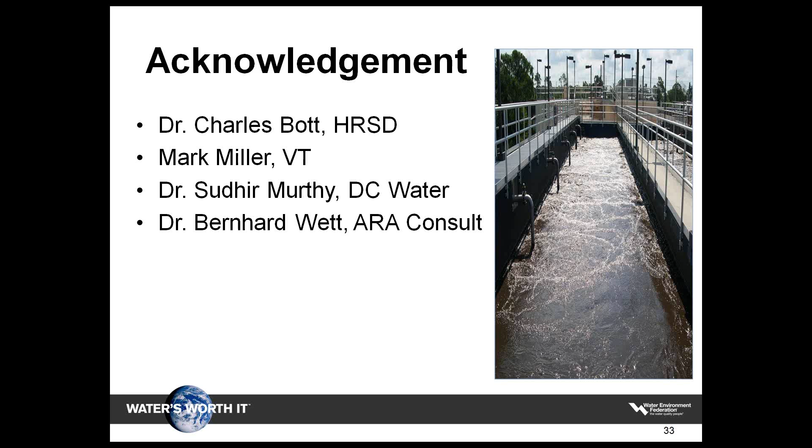Current applications of these processes recognize that there are three forms of substrate in wastewater: particulate, colloidal, and soluble. The particulate and colloidal substrate are effectively removed from solution by biological flocculation and adsorption into the biological floc, followed by solids-liquid separation.

The soluble fraction can be removed three ways: by intracellular storage, by biosynthesis, or by biological oxidation.

As Leif mentioned previously, 40 to 60% of the energy in a conventional activated sludge plant, or any aerobic wastewater treatment plant, goes to aeration. In high-rate activated sludge processes, this is even more pronounced since we're not getting oxygen gains from denitrification in most cases. The issue with aerobic treatment is that electrical energy is required to provide aeration so we can remove chemical energy. This practice is needed by current technology that limits carbon removal to meet secondary standards.

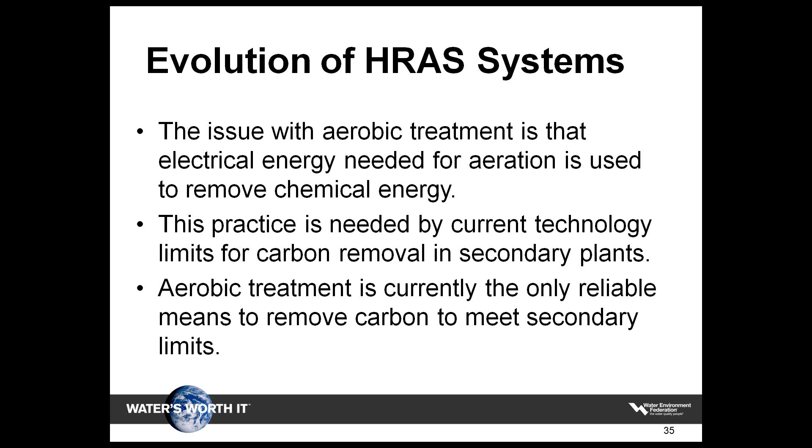There are two ways of designing and operating high-rate activated sludge. The first focuses on carbon oxidation, which is normally how we design these systems: providing enough SRT with an adequate F/M ratio to remove COD and meet secondary standards. Typically, solids retention time or sludge age is in the range of 3.5 days or a bit less.

Food-to-microorganism ratios range from 0.5 to 1 gram of BOD per gram of VSS, with fairly long detention times up to about 3 hours. Mixed liquor concentrations are between 1,000 and 3,000 milligrams per liter, with high DO concentrations normally around 2 milligrams per liter. The other way of operating is by optimizing the carbon adsorption process, which uses less energy.

In this case, systems operate at a really low SRT, lower than 0.5 days, with fairly high food-to-microorganism ratios between 2 and 10 grams of BOD per gram of VSS. Detention times are fairly short, less than half an hour, and DO is fairly low, normally around 0.5 milligrams per liter.

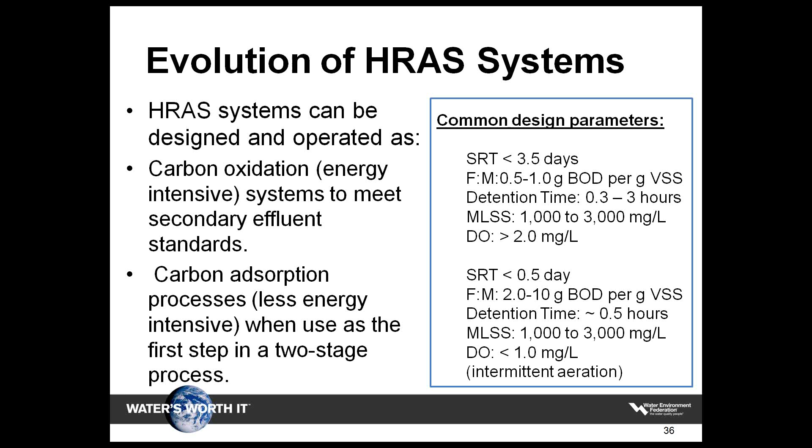When these processes use a configuration like this two-sludge system, we can operate high-rate activated sludge plants to minimize the aeration energy needed while maximizing carbon adsorption. This means putting in just enough energy or air to capture enough COD or carbon to redirect to an anaerobic digester for energy production, while also reducing the load into the second stage, the B-stage for nutrient removal, requiring less energy there as well.

When operating in a two-stage process, we can run at low enough SRT and low enough DO so that carbon oxidation is minimized. This means we're mainly removing particulate and colloidal substrate by flocculation, a low energy process, and storing some of the soluble COD into the floc rather than oxidizing it. The transfer of organics from the liquid train to the anaerobic digester is maximized, so more energy can be produced in this type of process.

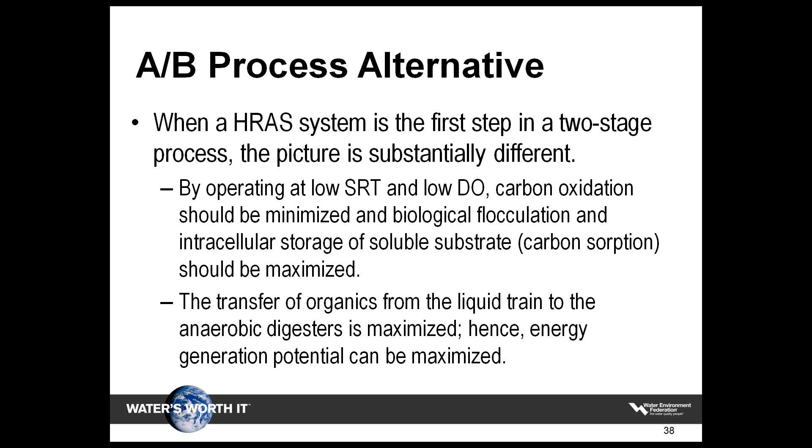First, I want to show this plot, which shows the effect of the aerobic SRT on the waste activated sludge volatile solids percentage. This is important because we're talking about energy, and what we want to do first, when we look at high-rate processes, is maximize the energy potential of carbon in the wastewater and transfer that to the anaerobic digesters.

As we increase the SRT of a process, we get some assimilation, some actual digestion within the reactor, and the VS content of the mixed liquor goes down. By operating at a shorter SRT, in this case about 0.5 days, we can maximize that VS percentage in the activated sludge plant, and therefore maximize the energy potential from that facility.

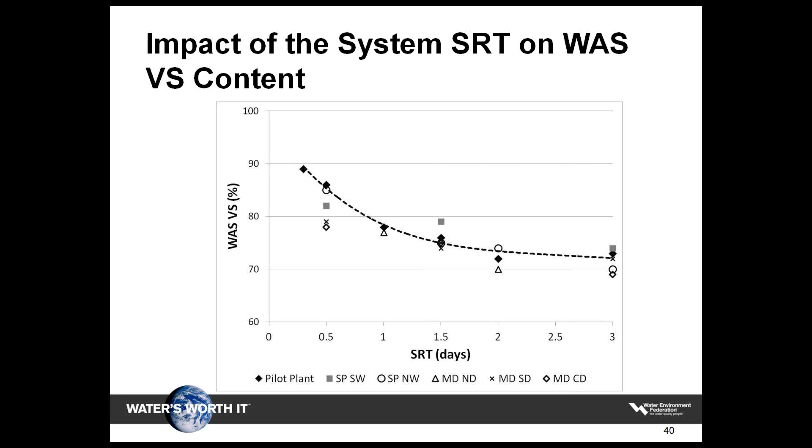To optimize these processes, we have to understand the mechanisms involved in the removal of the substrate as a whole, especially the three types we mentioned before: the soluble, the colloidal, and the particulate. This plot shows the effect of sludge detention time on removal efficiency from a high-rate activated sludge process. As we said before, these processes have normally been operated at fairly high SRTs, meaning 2 days or longer.

Based on these plots, we can see that the removal of all three substrates has been maximized at high SRT. So we're talking about getting pretty high removal efficiencies at the high SRT.

However, as we start cutting down the SRT to move toward a 0.5-day SRT, we see there is little effect on removal efficiency for the readily biodegradable soluble substrate. However, the colloidal and particulate COD are fairly affected by just a reduction of the SRT. So we have to find a balance, where we want to operate this process to minimize sludge while still maximizing removal efficiency to meet requirements.

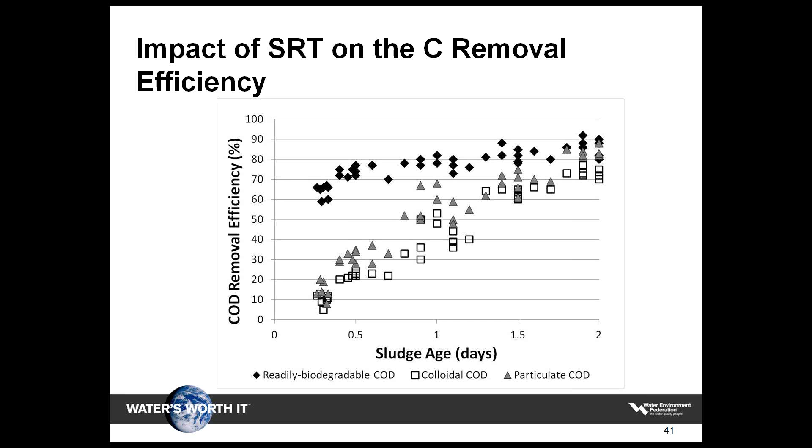In addition, we have to look at ways of minimizing energy use. One way to operate the system is not only to reduce the SRT, but the overall goal is to promote storage of the soluble COD substrate rather than oxidation. We know that oxidation of the soluble substrate requires higher energy than just storage, and that's what we wanted to show with these experiments.

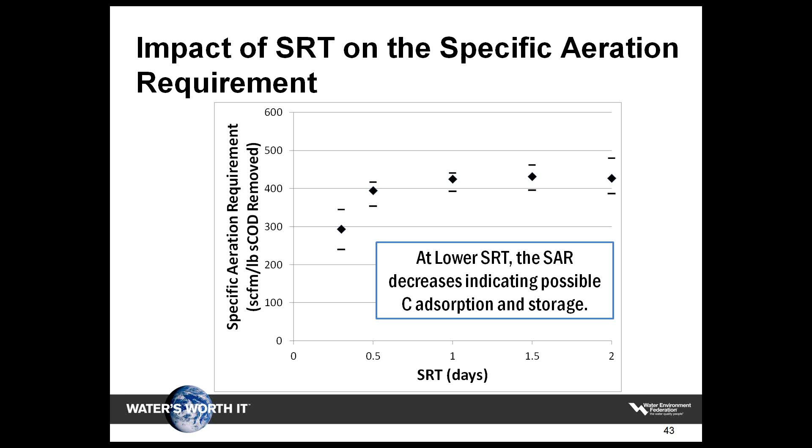One of the easiest ways to maximize the energy potential from this type of process is by maximizing the removal of particulate and colloidal fractions of the COD, and therefore transferring those fractions from the aeration tank to the anaerobic digester.

However, at the same time, we have to try to find a sweet spot to operate at a low enough SRT and a low enough DO concentration to minimize the oxidation of soluble COD and to maximize the storage of the COD into the bioflocs.

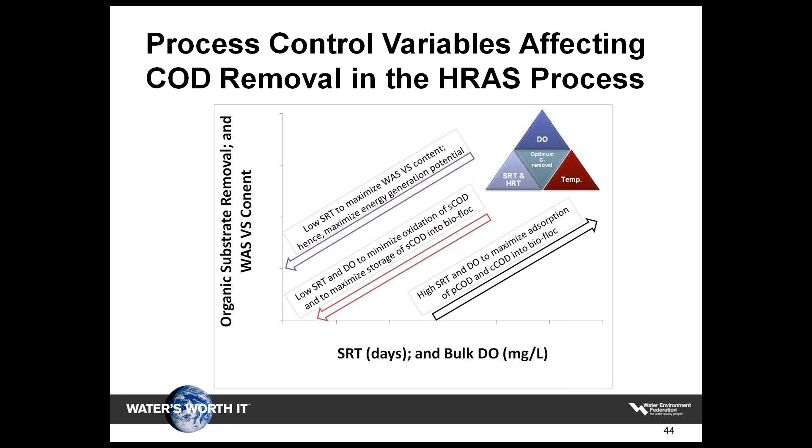Right now, especially Hampton Roads as well as DC Water, they're actually developing strategies to operate these A-stage processes, and they're doing so by tracking or measuring the carbon dioxide production rate from these processes.

We know, based on the literature out there, that high heterotroph activity actually indicates carbon oxidation, which means if we have high production of carbon dioxide in your system, that could be related to the oxidation of the substrate in your process.

By reducing that carbon dioxide production, which means now that we're shifting from that oxidation to the storage part of the process, we're trying to understand a little bit more how we can use these new techniques to actually control high-rate activated sludge processes.

Now I'm going to talk about a case example. This data was provided to me by Dr. Bernhard Wett, and this is the Strass wastewater treatment plant in Austria. It uses a two-stage process, and it's an AB plant. It treats a load that varies from 90,000 to about 230,000 population equivalents.

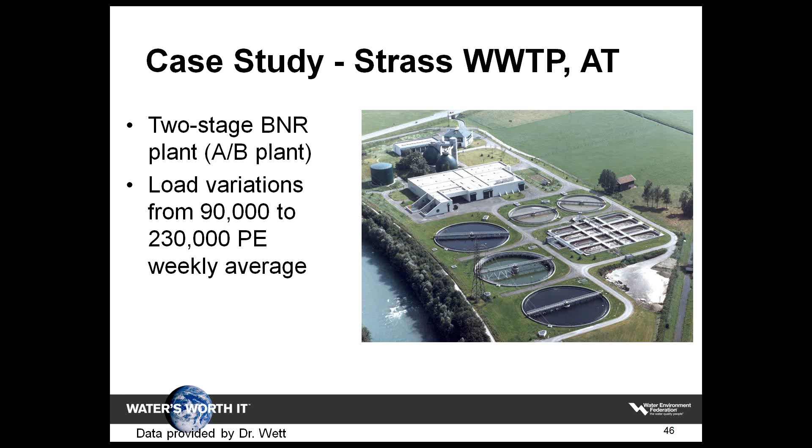Right now, the A-stage for this facility actually operates at an SRT of about 0.5 days. The HRT is roughly 30 minutes, and the DO concentration is about 0.5 milligrams per liter.

The plot that we have here shows the COD mass balance for the whole plant, but I want to concentrate basically on the A-stage part. We can see that the A-stage at the Strass wastewater treatment plant removes about 60% of the COD from the incoming water, utilizing little energy. Of course, that COD is then transferred to the anaerobic digesters to maximize the energy potential.

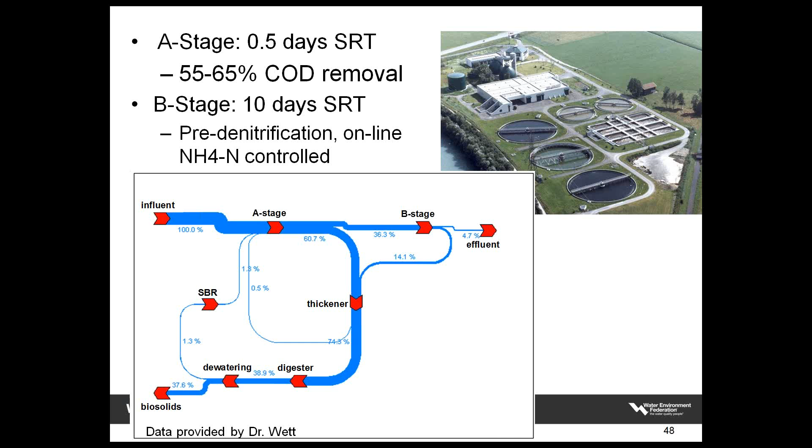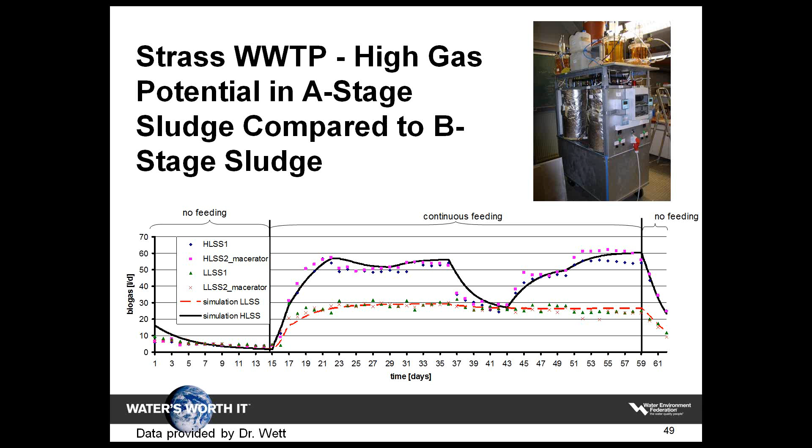Therefore, by maximizing the sludge production in the A-stage, the high-rate activated sludge process, we will maximize the overall energy production rate of the plant as a whole.

However, by optimizing the process and reducing the SRT and the DO concentration to some level, we can convert these energy-intensive processes into less energy-intensive ones by maximizing the adsorption of carbon rather than oxidation. The proper selection of SRT, HRT, and DO is related to your effluent quality. However, the proper selection of these parameters will maximize the energy potential of your facility.

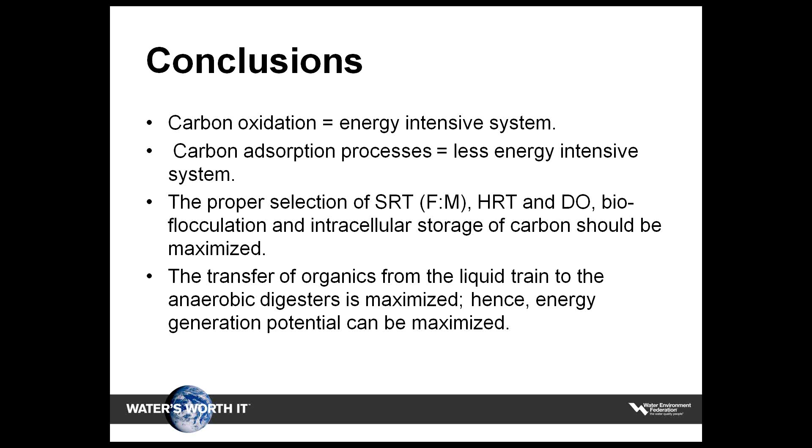And the overall goal of the A-stage process, especially when you try to implement an A-B stage process, is to transfer most of the organics from the liquid train to the anaerobic digester to maximize energy. That's my last slide for the second presentation.